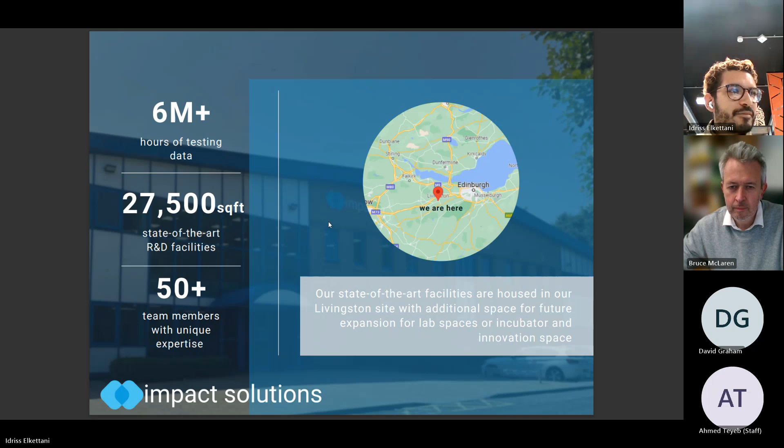So Impact Solutions is a testing center and R&D laboratory. We're based just west of Edinburgh in Scotland. We primarily started in the polymer testing space, but we've recently expanded our research areas into industrial biotechnology, process intensification, battery science, and waste valorization. As I mentioned earlier, we are a UKAS accredited laboratory. A lot of our strategy is based around trying to develop sustainable solutions for industry, and we tend to take a collaborative approach to working with our network of academic and industrial partners to develop those sustainable solutions.

We were established in 2002 as a spin out of BP Chemicals. And since then, we've grown our company to just over 50 people, and we've spun out three companies: Impact Recycling, Reventis, and Cellmine. We can tell you more about those via our contact details at the end. I'll hand over to Brunel to give a quick introduction, or just to add to what was said earlier. Ahmed?

Brunel Innovation Center is a joint venture between TWI and Brunel University London. It's part of the Institute of Materials and Manufacturing of Brunel University, and we are based in TWI facilities in Cambridge. We run many collaborative projects. That's our main business: research and collaborative projects in different fields, including power ultrasound, artificial intelligence, data science, agri-tech, biomedical devices. And this project, SENTIO, is related to our electronics and power electronics team developments.

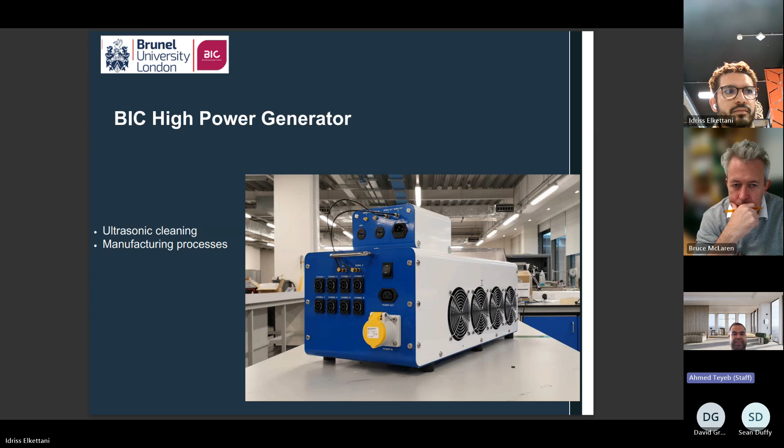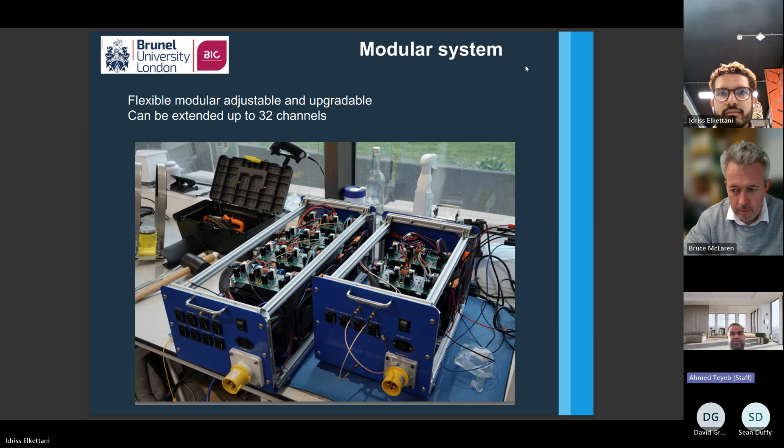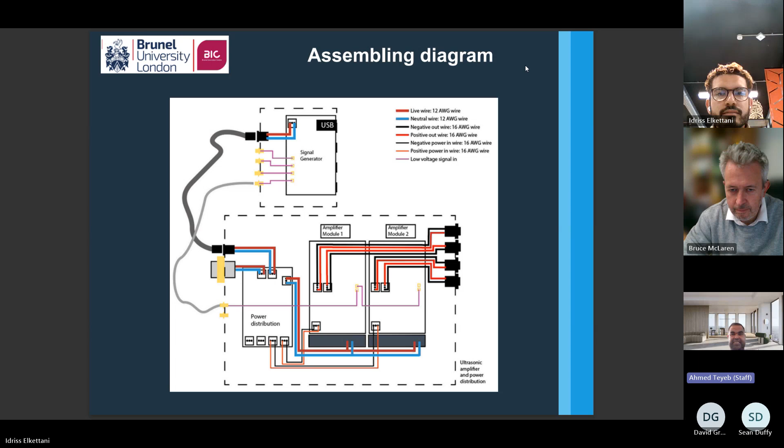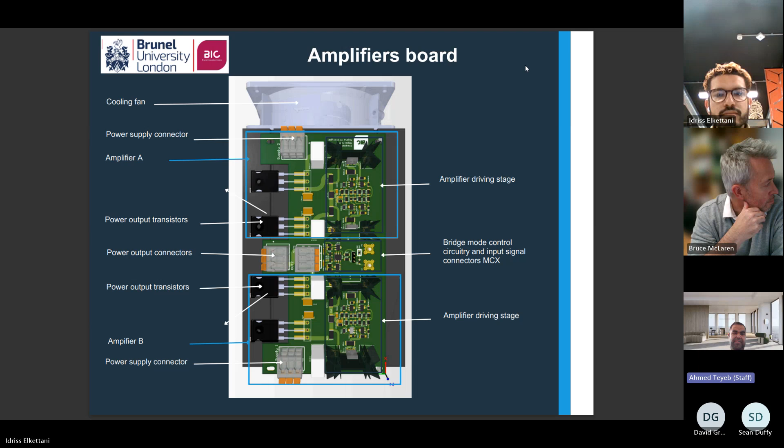Sometimes what happens, it didn't happen to us in this specific application, is we can see some frequency and impedance shift in the transducer, and we will need to be able to track that and change the frequency instantly. And this is why we need some input for our signal generator. It is already equipped with these inputs. In case we see a drop in the performance and we want to introduce the closed loop, our system is ready for that.

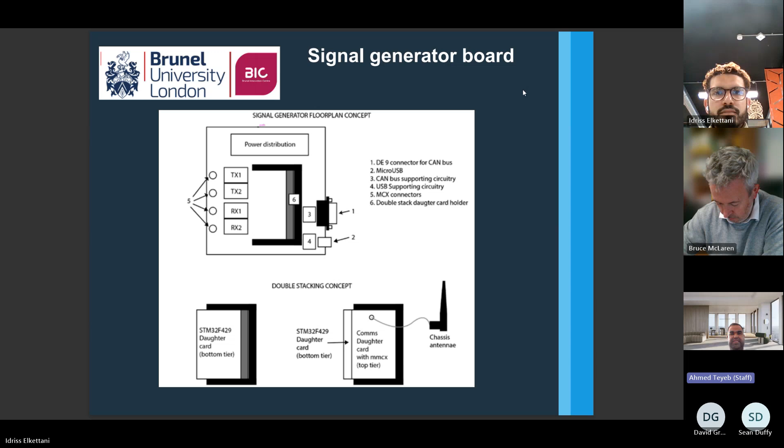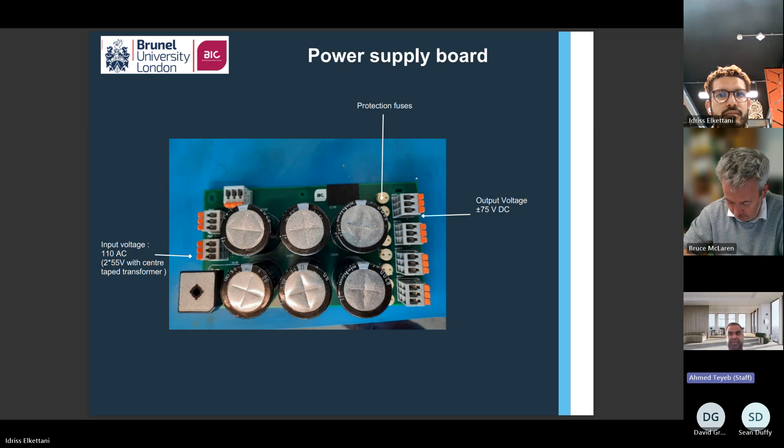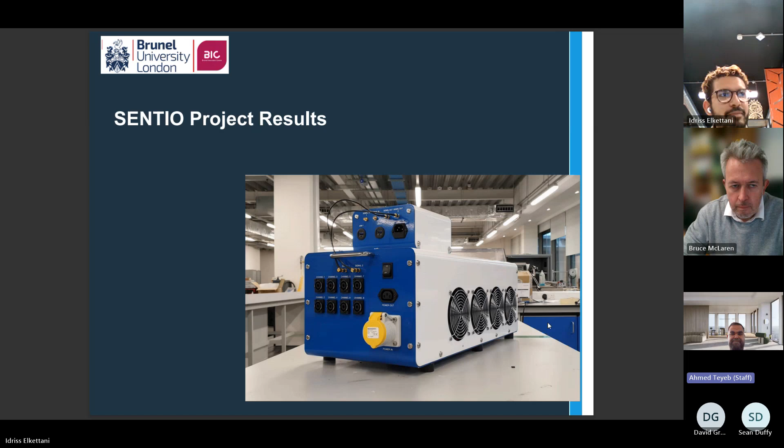From the SENTIO project perspective now, we started using some plastic in our labs before moving to McLaren facilities. We made some checks to see how we can get high temperature using the ultrasonic friction.

For this trial we used an industrial off-the-shelf transducer, and we got some plastic from McLaren. We ran our tests using a thermal camera to check how far we can go in producing the heat.

As Idriss explained in the beginning, the aim in this project was to use ultrasonic power on two sides. The first is to create cavitation in the molten plastic, and the second is to assist the heat generation and reduce the use of conventional heaters, and also to reduce the excessive and useless heating of bioplastic that might create some degradation in the properties.

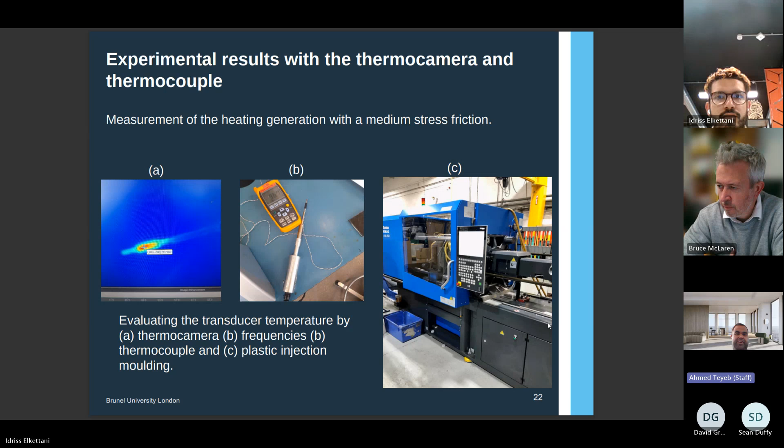And with ultrasound, there is potential to make some localized heating of the plastic that is being prepared to be injected in the next injection cycle.

Next slide please. Yeah, I can. This was the Brunel stuff that was installed in McLaren plastics. Yeah, you can carry on with this, Bruce.

So it was difficult to try and retrofit Brunel's equipment into an existing mold, because an existing mold has a lot going on inside, like the feed system, where the ejector pins are, etc. So the decision at the very beginning of the project was to quickly make a new tool in-house, but with the provision of space where possible to adjust and add in all of Brunel's equipment.

I don't know if you can make it out, but it was actually a golf tee mold that we manufactured because we wanted all the parts made through the trials to be able to be used after everything had finished, rather than just doing a standard test plaque or something like that.

So you can see here the mold and the start of the trials with the SENTIO, the Brunel probe attached to the side. Preliminary, we did all the trials at the very initial stage in polyprop, just to get a baseline.

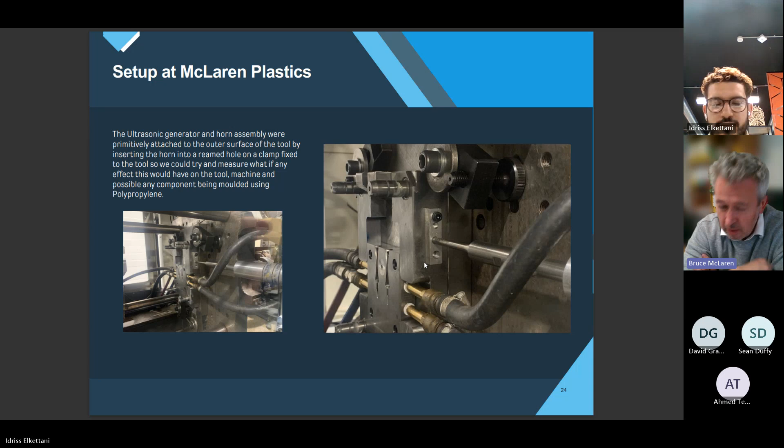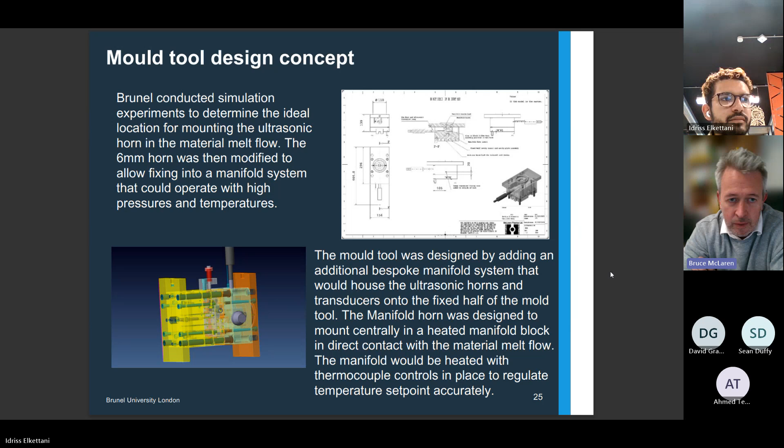Next slide please, Idriss. This is just some technical drawings of the mold we made, showing the provisions for how we're going to attach the horns, etc., onto the mold.

Next slide. As you can see in the image at the bottom left, we had three different sweep transducers that worked at different hertz. In the technical drawing, what we were doing is trying to get those in the sprue as close to the part as possible.

In conjunction with Brunel, my colleague David, who's on the call as well, went through a series of trials, both with the ultrasonic switched on and off, measuring the different influences that it had. I don't know if David has anything he wants to add at this stage.

The only thing is we ended up putting the 6mm horn into a manifold system that had cartridge heaters to heat up the manifold block to a minimum temperature, and then we used the ultrasonics with the horn in the melt flow to agitate that melt flow and react to the plastic. That's what you see in the CAD view, just a sectional view of the manifold system with the transducers in place.

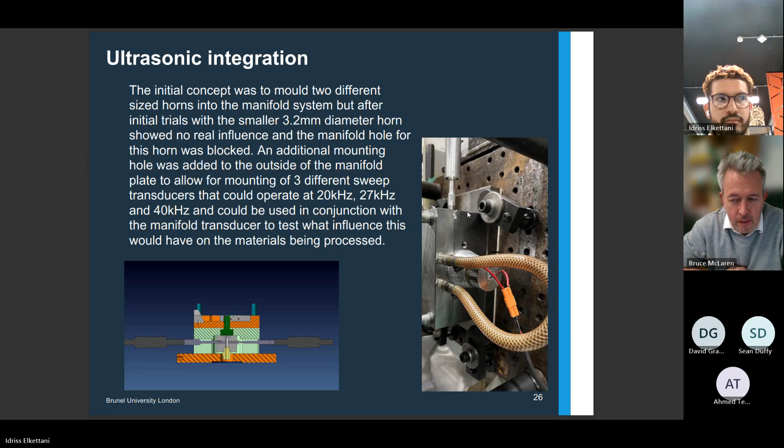And what's very interesting is we know from experience, because we've been using biopolymers for a few years, how tricky they can be to process. So this is why this Innovate UK research project really appealed to us, because we do have some biopolymer projects in mass production, and anything we can do to give us a better process window will be very beneficial.

We started off with the golf tee molds on the left-hand side, but then during the project it was decided to make a spiral flow tool as well, just to help with the analysis.

What we also started to see is if we either had the ultrasonics on or off, we could create a short molding. But if we switched them the other way around, we then had a complete molding. So we were seeing a difference between having the ultrasonics off and on.

So the spiral mold on the right that we made as well really helped with that analysis, and the results that we submitted to Brunel and Impact.

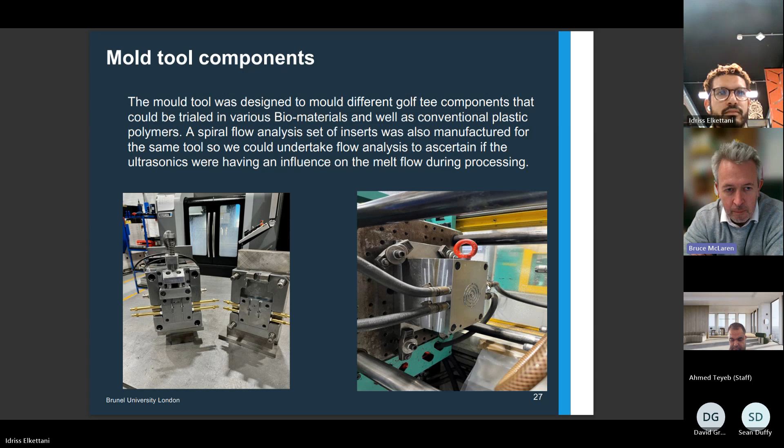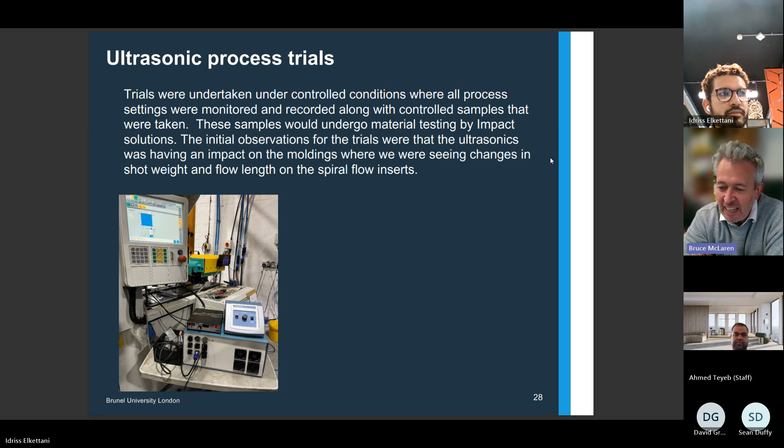That's just one of our injection molding machines with all the equipment. The team at Brunel very kindly lent us their equipment to control, and that's what we helped to do the trials with.

At the beginning of the project, we always wanted to use polyprop just as a control. It's a known material, we know how it's going to work. And then through conversations with the rest of the guys on the grant, we chose these materials to trial with.

So Ecovio, I think that's how you pronounce it, that's like a PBAT/PLA. Solinatra is a PLA as well, but it's been modified so it doesn't need industrial composting - it's better for home composting and things like that. We're very interested to see that, because it's quite a new biopolymer to market.

Arboform is basically wood in a very simple term, and PVOH - we did trials with both cold water and hot water PVOH. Probably one of the most common uses of PVOH is that very thin film that goes around your dishwasher tablets and things like that. But it's getting used in more and more applications at the moment, though it is moisture sensitive.

So all of them, yeah, they're not quite as easy to process as a good old polyprop. But it was very, very interesting.

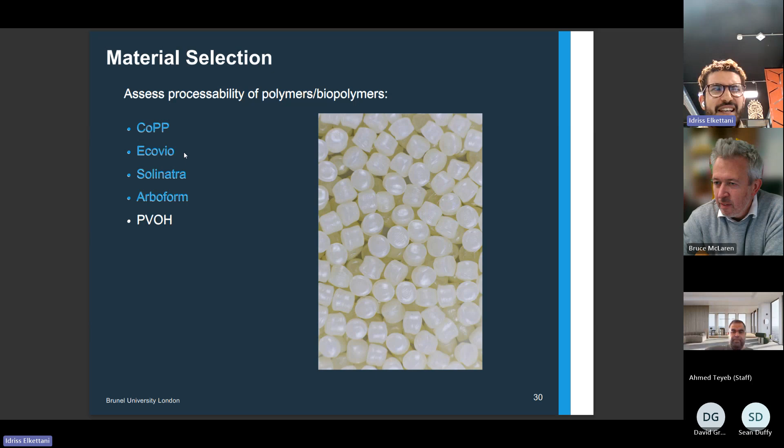So the Ecovio, like Bruce said, is a PBAT PLA blend, and I think because of the ratios they use, it can count as home compostable.

In terms of assessing the performance of these biopolymers, we took the golf tees that Bruce and the rest of his team manufactured with different parameters on the ultrasonic subsystem. We were quite interested to see how that thermal journey the polymer has gone through, from pellet to mold, has affected its properties, and more interestingly, whether it's had an impact on its biodegradability, because we're quite interested to see if we can exploit the ultrasonic subsystem to essentially control the rate of biodegradation.

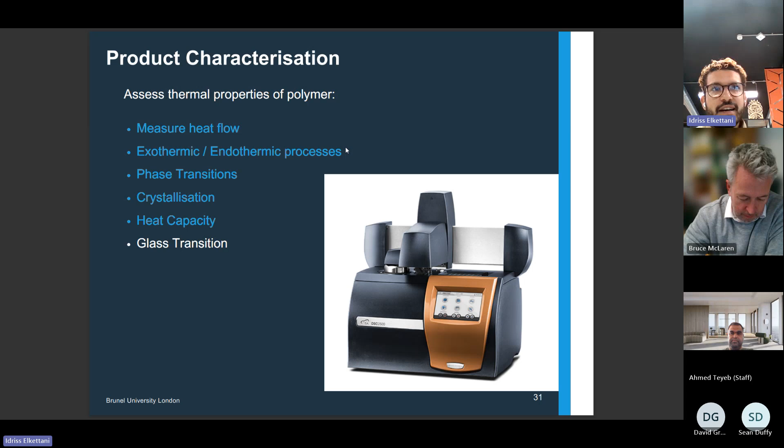And I've just got some data earlier this week which addresses that.

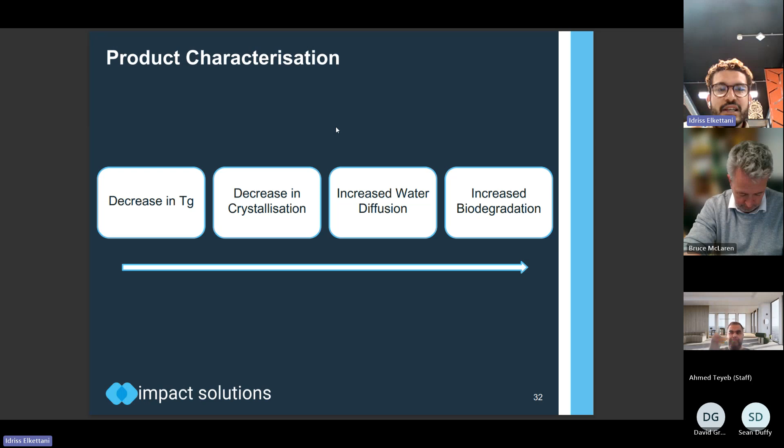In terms of how we think these chemical properties are linked to the ultrasound, as Ahmed mentioned, the working assumption is that the ultrasonic waves induce local areas of high heat, and what that does is create an overall reduction in viscosity. We're hoping that means we can process the polymer at a lower temperature than needed. We reckon the ultrasound is leading to a decrease in the glass transition temperature, denoted here as TG. The glass transition temperature tells you at what point your polymer goes from the amorphous region into the crystalline region.

So a decrease in the TG value corresponds to a decrease in the crystallization. What that means is the polymer essentially becomes a bit more porous for water and anything in water - in this case, bacteria and enzymes that can induce biodegradation. So we think that if we can measure the difference in TG, we can start to look at how that influences the biodegradation at the end.

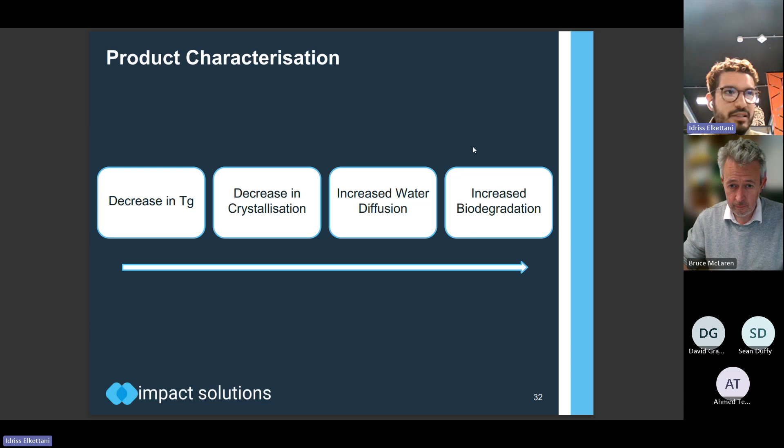But we did notice that with the bio-based polymers that degrade more readily, so the PVOH for example, that's a readily biodegradable polymer, we found that we managed to record a reduction in glass transition temperature of 5 degrees, which is significant but not meaningful for us. For the other polymers, for the polypropylene, it's had no effect. For the Ecovio, it's had minimal effect - there was a 1-2 degree drop, but the most apparent drop in TG was in the PVOH.

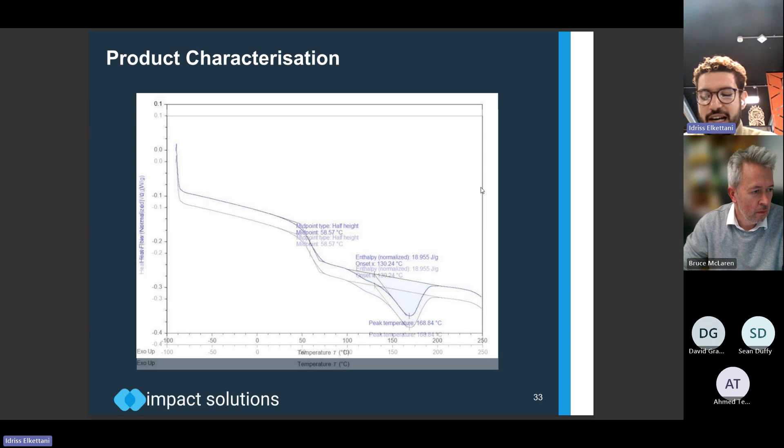So we thought it's a good opportunity to check out how the PVOH exposed to different ultrasonic parameters, and what effect that has on the biodegradation rate. So what we've done is we've taken the golf tees and we've run them through the OECD 301F test.

So what that involves is taking your solid sample, so in this case the golf tee... I wish I had, I've got a - nope, that's not a golf tee, it's another injection molded part.

Essentially, we grind up the molded component into a powder, and we put a known quantity of that powder in a flask that contains activated sludge, and we connect that to a respirometer that can measure the CO2 over time. Using some equations which link up the CO2 production and the composition of the polymer, we're able to work out the biodegradation rate on day 28. For a polymer or a prototype to pass the OECD 301F, it needs to show that it has degraded above 60%. So the results are quite interesting.

For a standard operation where no ultrasound was used, neither at the manifold or later on, we get a biodegradation rate of 77%. When the manifold ultrasound was turned on and the ultrasonic sweep was also turned on, we noticed that the biodegradation rate dropped to 50%. So in this case, this one would have failed the OECD test.

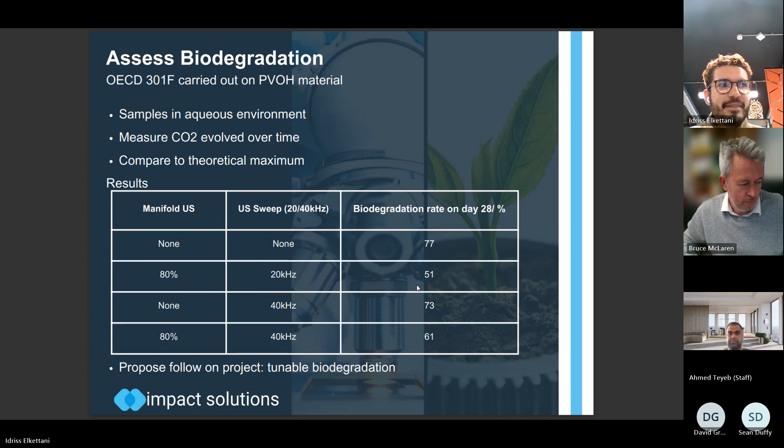So in terms of next steps for the analysis on our end, I mentioned earlier that the TG was a good indicator of biodegradability, but as you've seen from the graphs, we can't really notice anything meaningful. So we're going to start looking at other analyses that we can do on our polymers.

Namely, we're going to do a GPC analysis, and what that does is give us the molecular weight distribution - that's how varied your polymer chains are within a sample in terms of chain length. A reduction in molecular weight generally means a material is more biodegradable, because it's easier for bacteria to take it into its cell, degrade it into CO2 and water, and then spit it back out.

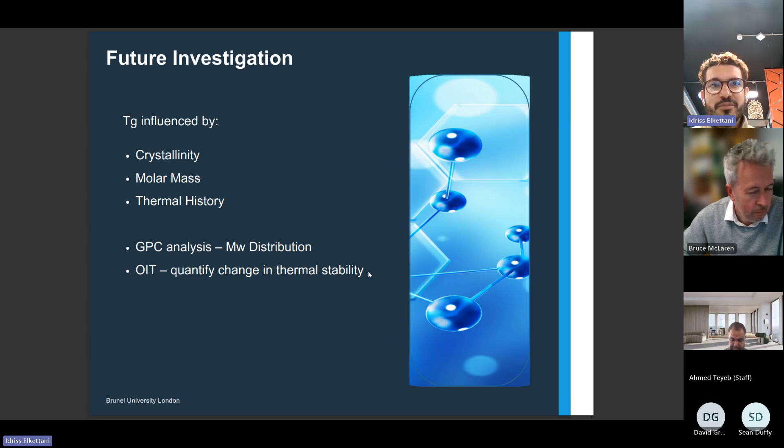The other thing we're quite interested to look at is the OIT, which is oxidation induction time, and that essentially gives us a nice number to pinpoint what the thermal degradation has been throughout a polymer's thermal history. We're expecting that the ultrasound-induced components have higher thermal degradability, but we were surprised with the TGA results, so we might be surprised with the results from the OIT as well.